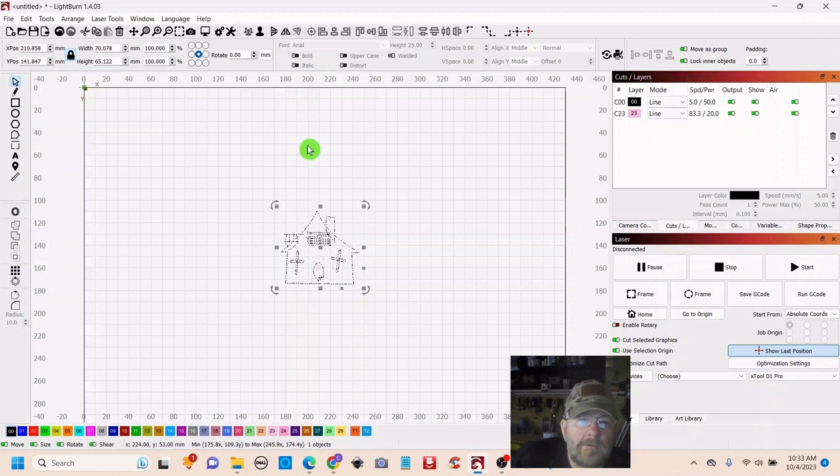We're going to make a Halloween village, and we're just going to do it on the fly. I didn't do a lot of planning for this because I've been pretty busy, but let's do this. So I got some free vectors off the internet, and I'll put links to those in the description. And we're just going to start with an old house. It says it's haunted. I guess we'll see.

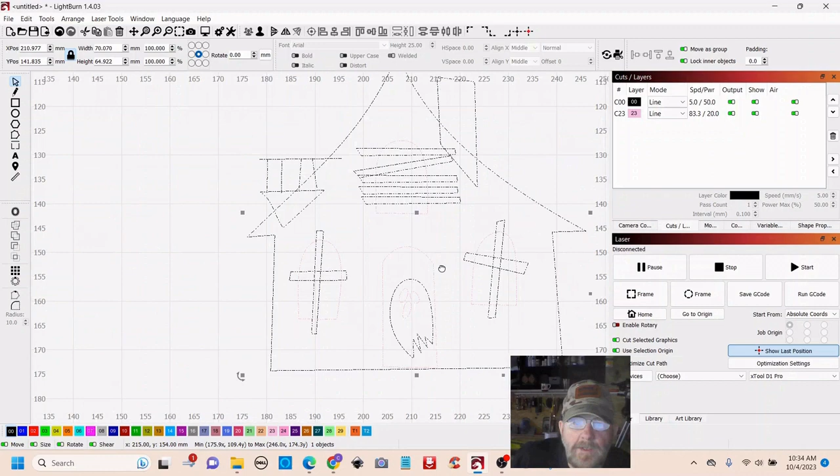Sometimes when you download vectors, they're not real straight. So we're going to put a tab on the bottom of this. So let's try to straighten it up a little bit. And just select the entire piece. And remember, you can scroll in and out with your mouse wheel. You can push down on the mouse wheel and move the entire canvas. And we'll just pull this down to one of the grid lines. Straighten it up as much as we can. That looks pretty good.

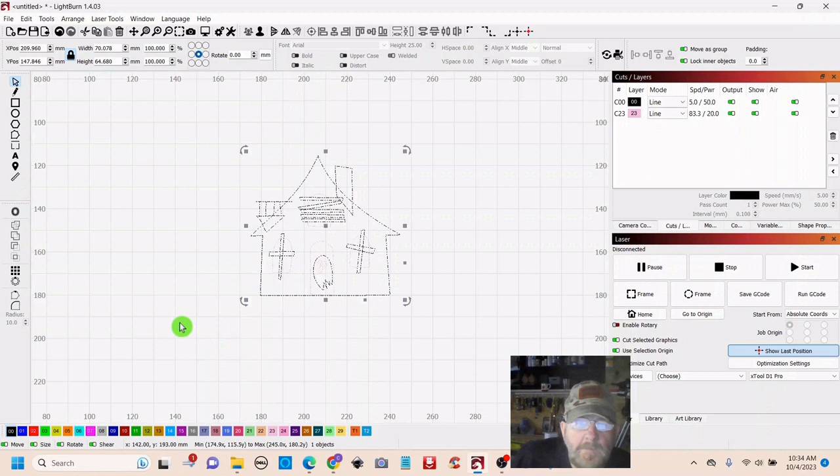Okay, now we're going to just make this a score. So set it for whatever your score is. I'm using a 40 watt xTool. So this is what I have set: speed of 40 and power 30. Depending on the wood, sometimes that can be too much, but it works pretty good on the 3mm plywood that we'll be using.

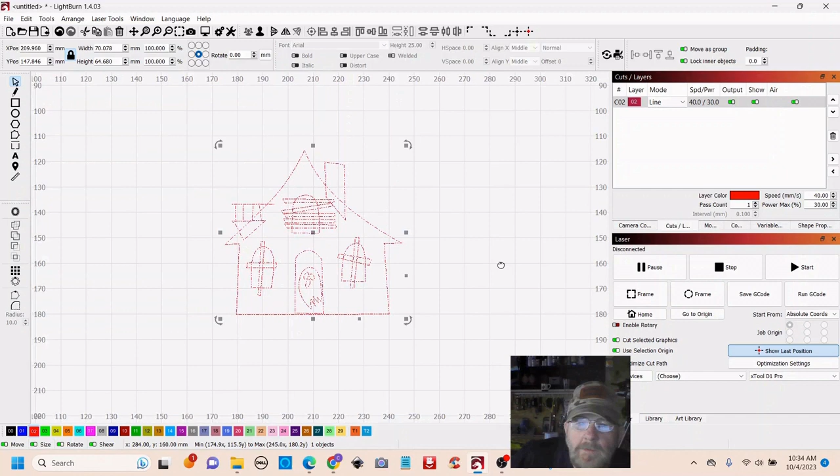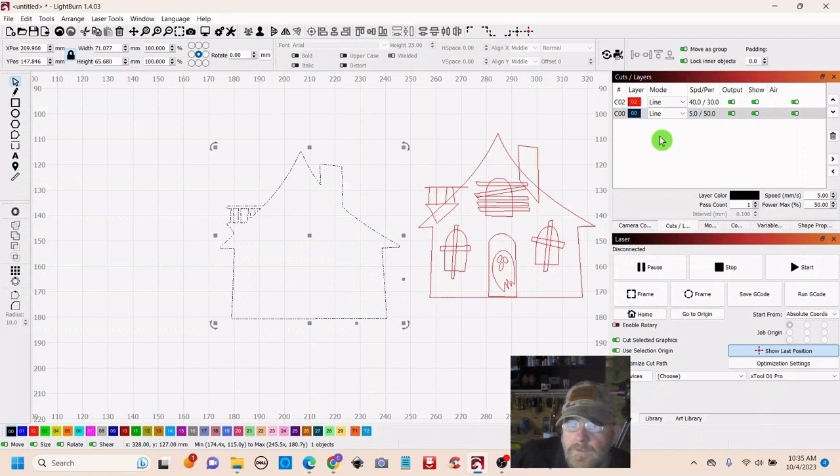Okay, so now you want to select again, go over to the left, do an outline. I've just got it set for a 1/2 millimeter. That should work fine. Then pull your original out of the way. Select your outline and set it for a cut line. And you can see off to the right, this is what I have set for cut. And be sure you always keep your cut line on the bottom so your cuts will be last.

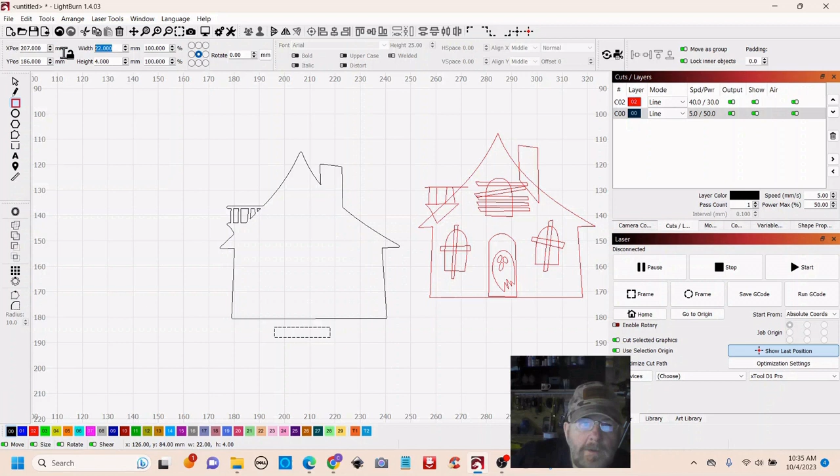Okay, let's put a tab. So grab a square off to the left, draw it out. Go up top, make sure your lock is off, and we will make it about 45 millimeters width and 3 on the height.

I got an allergy thing going on, so I'll be making some noise.

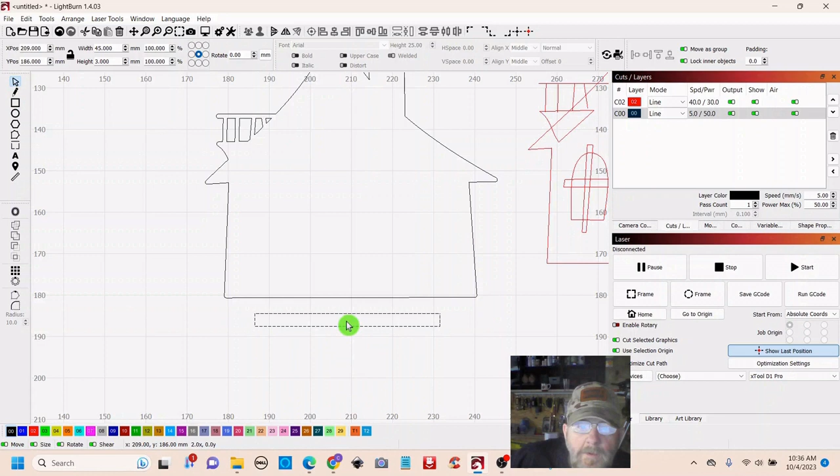Okay, so now select your arrow at the top, and then we want to snap this to the bottom of this, and we'll see if it'll connect. If not, we'll make an adjustment. Your mouse cursor will change to a line, and you can pull it up and snap it. And it looks like it connected here, but not here. So we're just going to make a correction. We'll go up top, and instead of a height of 3, we'll make it a height of 4.

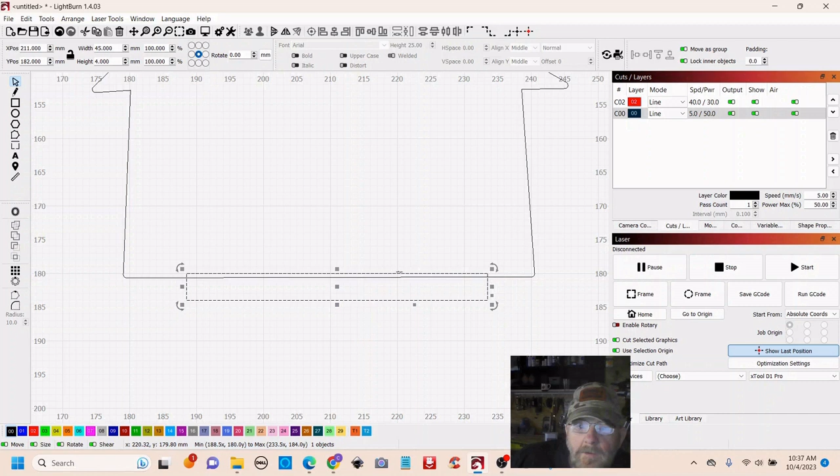And then we will just break the plane like so. Something like that. And that'll give us a little tab on the bottom. We just want to cross that line so it'll be kind of straight and not push through the bottom of our stand when we make it. So you would want somewhere around a millimeter across, not too much more though.

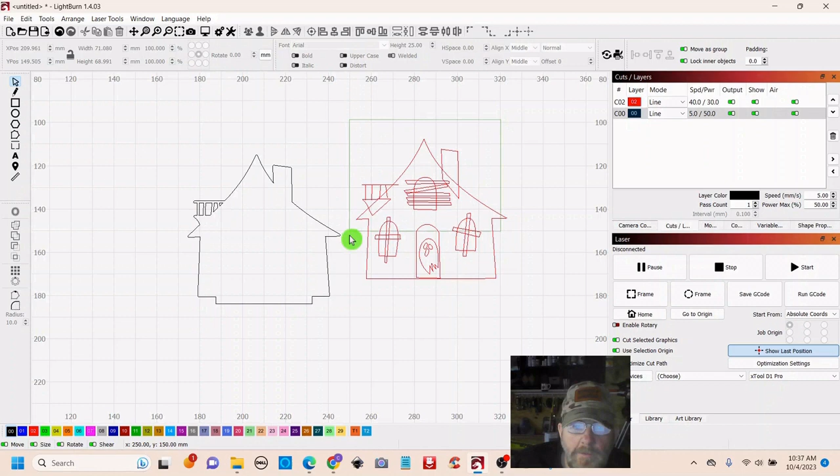Okay, so leave it selected, push shift, select the outline, and then go up top to horizontal align, and it will line it up for you. Then go over to the left to weld and click weld, and there we go. Now we can put our scored house back inside. Alright, that looks pretty good.

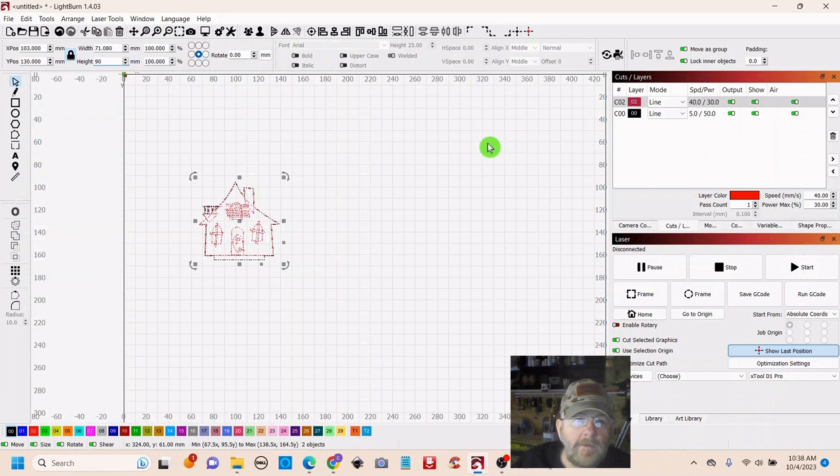Alright, so lock the lock back up top after you select the house. Lock it back, and then let's do a height of about 90 millimeters, and that'll give us about 3.5 inches of height, a little more. And when you lock the lock, it will adjust everything proportionately. Okay, so select, right click, and group, and our house is done. We'll just move it over out of the way.

And let's go back out and get us a dead tree. And again, all of these vectors will be linked down in the description so you can go get them.

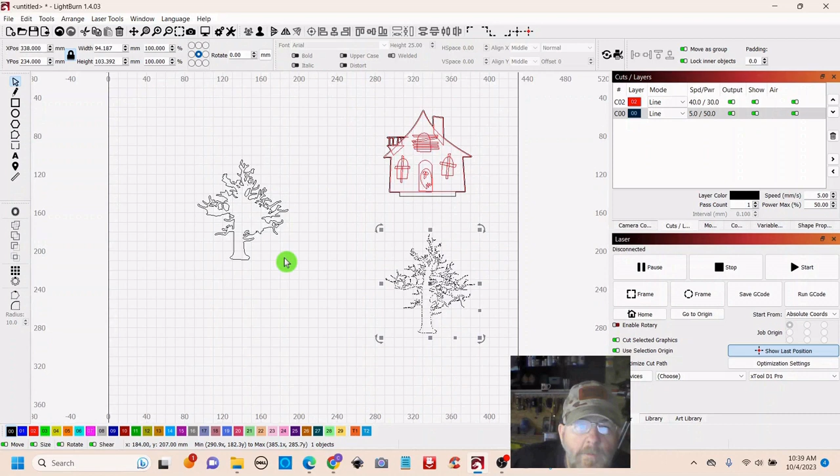Okay, so we can just go ahead and outline this. And the 0.5 is good again. Then grab your original, pull it out. You want to check out your outline, make sure there's nothing real weird with it. Looks okay. We've got to put a tab on that as well. So our tree,

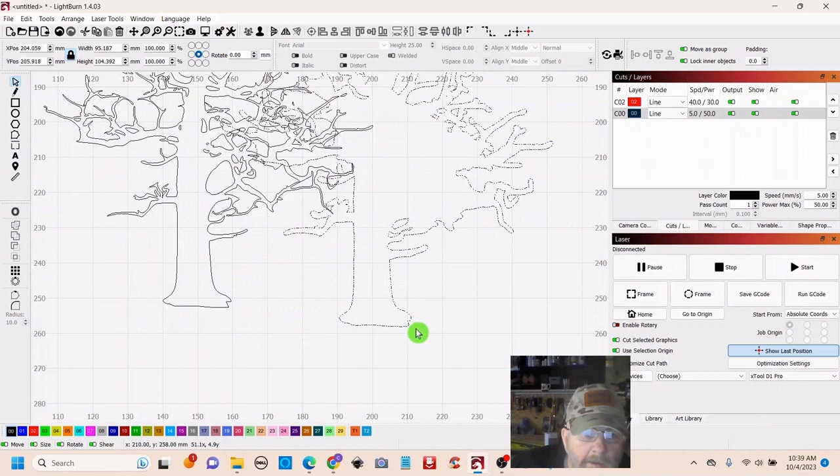I'm going to hit Control Z and put it back inside. Select the whole thing and put it up to the house just to get a reference. And that actually looks pretty good. Trees are normally a little taller than houses, so we'll go with that. Okay, so now I've got to grab the outline and pull it away.

And then we can select our original tree and make it a score. And then we can grab a square, come over here and make a tab that's big enough to work with the tree. That looks pretty good. We'll go ahead and make it 4 and pull it past the plane, and I should have unlocked that, and then we can stretch it out to the width of the tree.

Click our arrow to select. And it can go past, it's not going to hurt anything. Scroll in closer. And we will just break the plane with it, like so. Make it a cut. Leave it selected and then shift, select the tree. Go over to the left to weld. And now we have our tab.

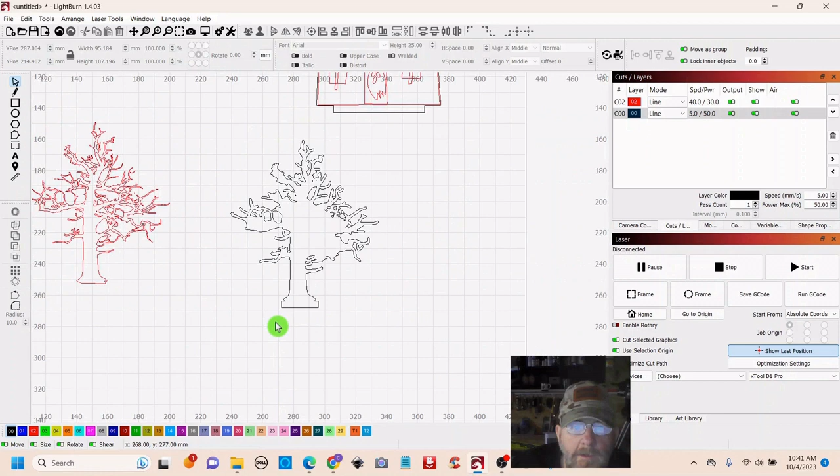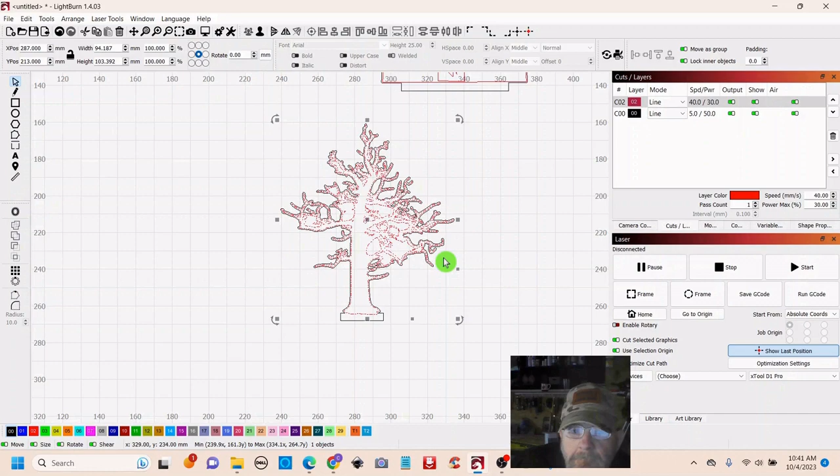Now we can put the tree back, get close enough to see and make sure we line it up properly. Sometimes the alignment tools don't work right if you have too much weird stuff going on like these limbs, but that looks pretty good. I think we will select the tree, right click, group, and call that done. Okay, let's go get something else.

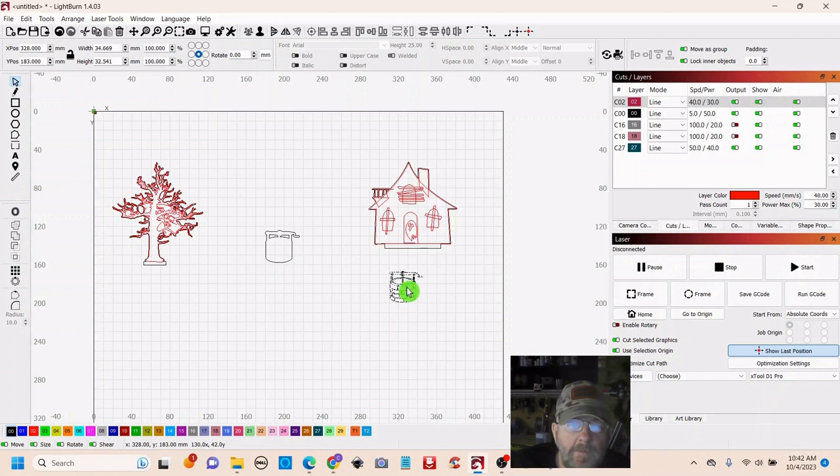That looks about right. Okay, so we will do an outline on that. Leave it at 0.5. Then we can pull out the original. Go get us another tab. And we'll just go ahead and make it 4 and 24. Looks pretty good. Just remember to click this arrow up top or you'll start making squares all over the page.

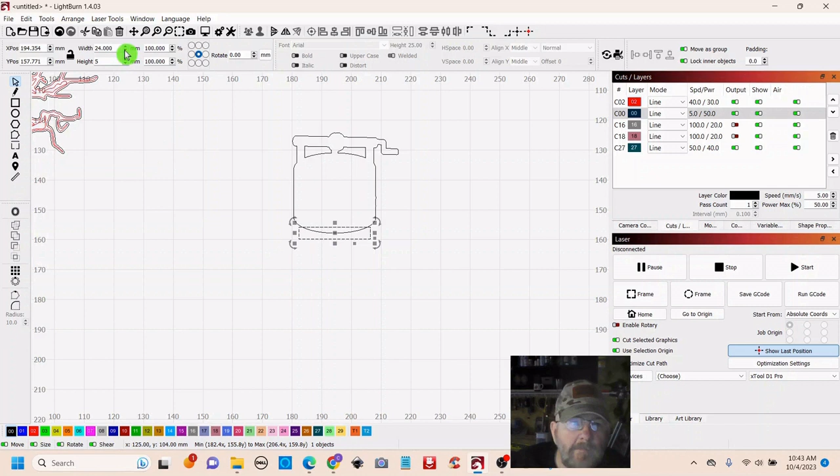Just break the plane. We can probably stretch it out because you want to make sure there's enough on the bottom to go into the wood you're working with. So we can probably make that 5. And again, if it was a square bottom, a straight line, it would just snap right to it. So that should work. So select your tab, shift, select the well, and then go over to the left and select weld. And there we go.

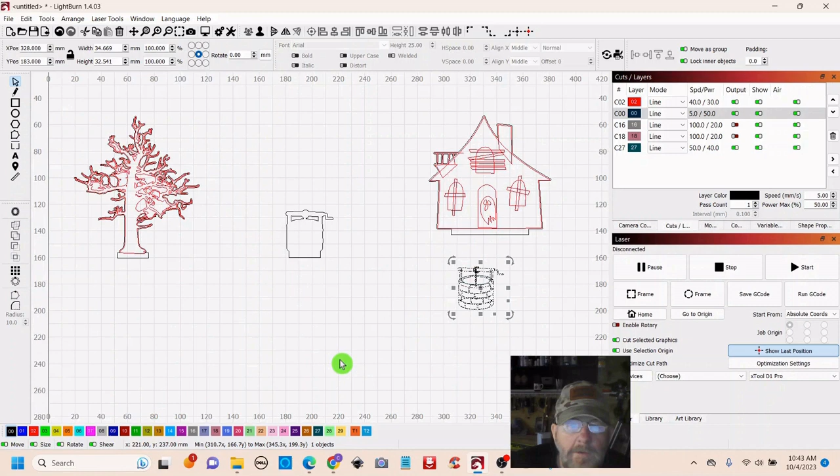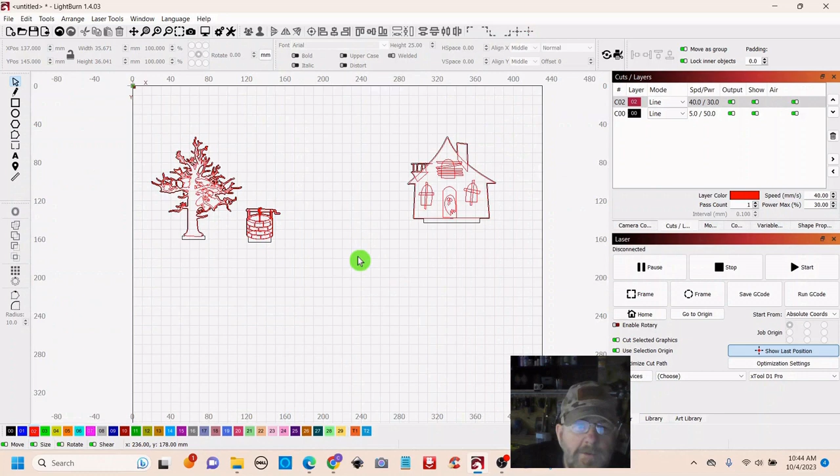Now we can set the internal portion to score. Bring it over and line it up. Looks pretty good. Select it and group it. And we're going to put an old witch in here at some point, so we'll make sure that's proportionate when we do that. So let's go back up and get us a gate and fence.

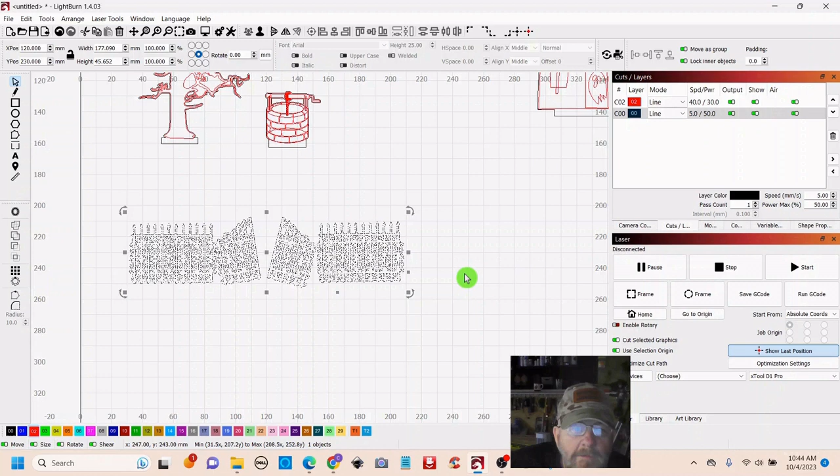I don't know. We'll see how this works out. That might not work out too good. Okay, so we're gonna do an outline on this. I guess what we'll do is make us a little graveyard, and this will be the gate in front of the graveyard. Okay, we can pull the inside out and go ahead and make it a score. And then we've got to find the best way to get a tab on here. So let's see what we can do.

Let's go up and grab a box. And just drag something out that will span the gate portion. And let's just move it up here and see how it looks. We can center that by leaving it selected and then shift and select the rest of the outline and push your vertical line. And I think we're going to have to make it a little bigger. I'm just going to drag it out a little bit.

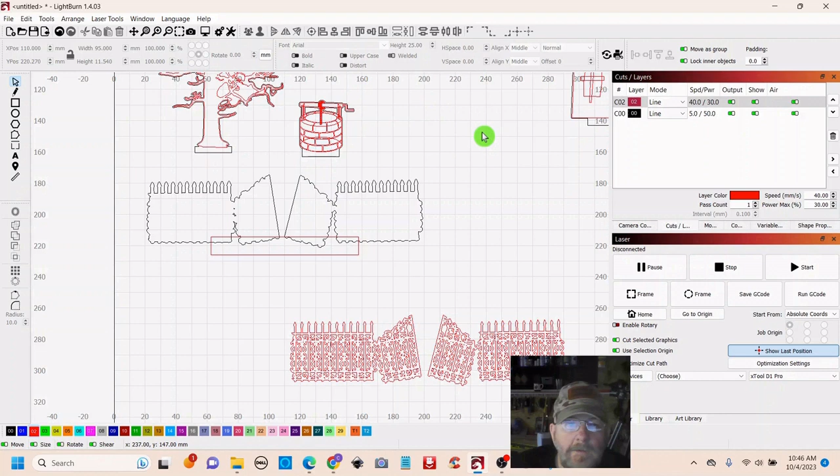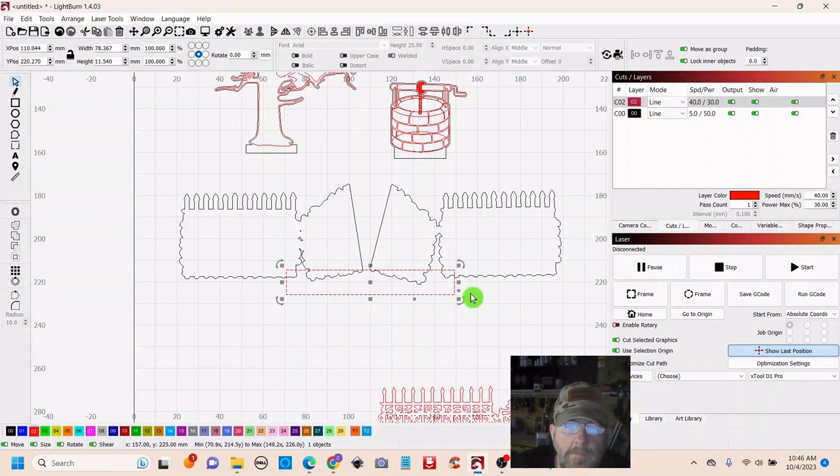We want to make sure there's enough to go through the slot that we make in the board. And some of these slots are weird sizes, so I may get confused. Maybe not. Yeah, that's a pretty long gate. I mean, pretty long tab. I'm going to shorten it up a little bit. And when I make the tabs or the slots, I'll probably have to remeasure these just to make sure.

So you could select that tab, make it a cut line. While that's selected, shift, select the rest of the outline, go over to the left and hit weld. Okay. Now we can grab the score portion and just get it set in there.

And then we will select it all, right click, and group. And it's pretty easy to make your own fence if you wanted to. Let me just take time to show you that, just in case you want to do it on another project. Just grab a square and make you a fence slat.

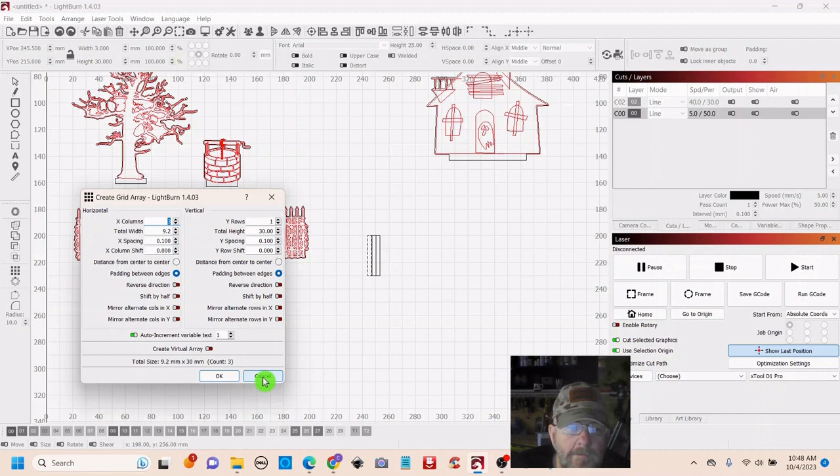Leave it selected. You can go over to array, and you set the width between the slats right here. So let's say 5 millimeter between slats, and then up here, let me move this out of the way. Up here on the columns, you just add... that is not enough width. So we are going to change the width. No, we're not. We're going to start over.

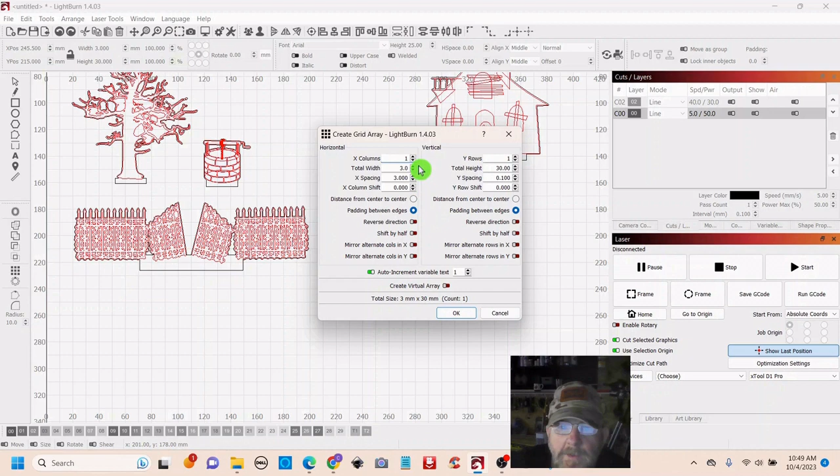Okay, so you have your slat. Click Array. Oh, I should have put it on spacing, not width. Okay. Spacing, let's just say 3 millimeters on spacing. I make mistakes, folks, so y'all just hang on. We'll fix them. So we have 3 millimeter spacing. We can go up to the columns, and it will add as many slats as you want.

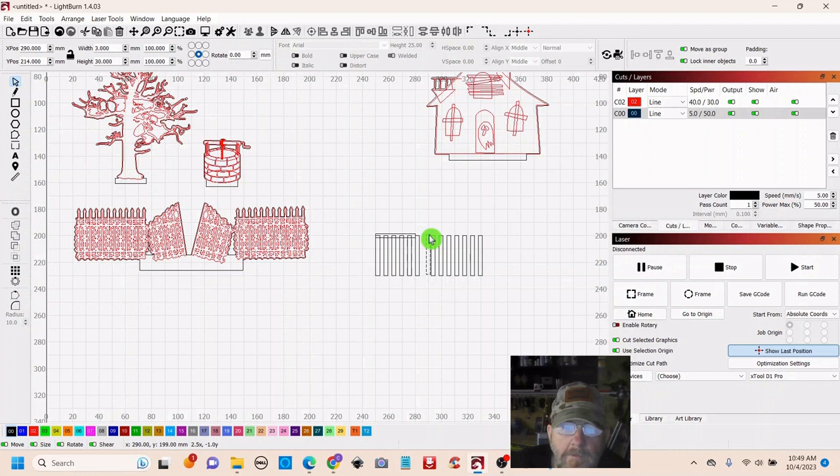And then you can pull one out, go up to arrange, adjust it, pull it back up here, line it up somewhere, wherever you want to. Control Z. You just want this top portion going across like so. And then you would want to duplicate it for the bottom and just get it out of the way.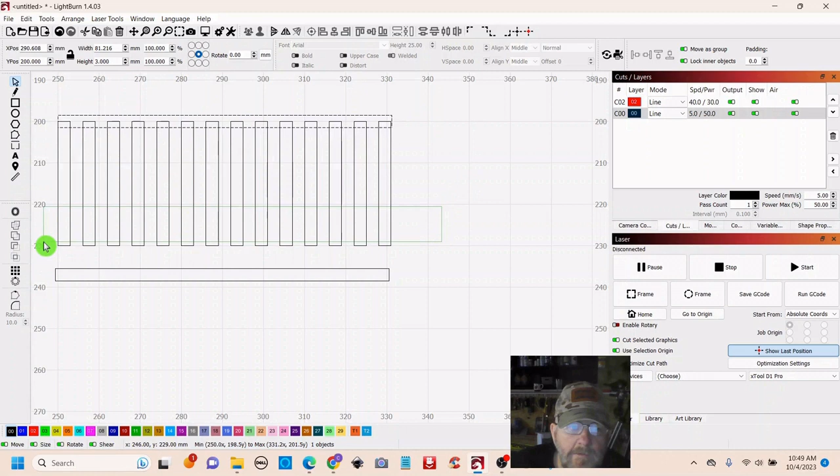And then you can select, shift, select all of your other slats, and then go over to weld and weld. And then you have a fence. And then you would do the same thing on the bottom. Shift, select, weld, and you have a fence. And of course you just make the gate smaller, turn it however you want to, and then do what we've done here on the bottom, and it would hold it into place.

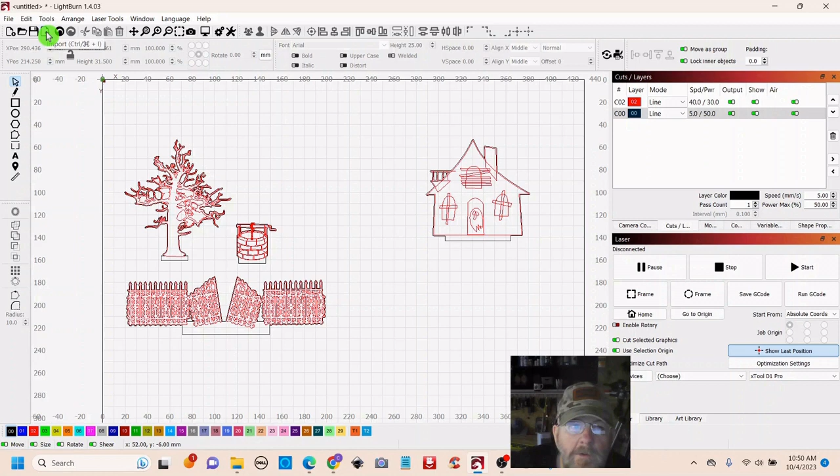Okay, so we will go with the original gate we had. Took us a little side trip there. Alright, let's see what else we can grab. We'll get everything made, and then we will make it as proportionate as possible. Alright, we got a tombstone here. It's pretty big. We will make it small and put it back here somewhere. Let's go get another one. Make them about the same size, and we'll probably have to resize these before we finish.

And then let's grab one of these, duplicate it, put it in the back, and make it a little smaller for a little forced perspective to make it look further away. Okay. Alright, let's go get something else. Here's our witch. So we have a witch. We want to size her up, make sure she's not bigger than the house. Probably about there, whatever that is. She's still a pretty big witch.

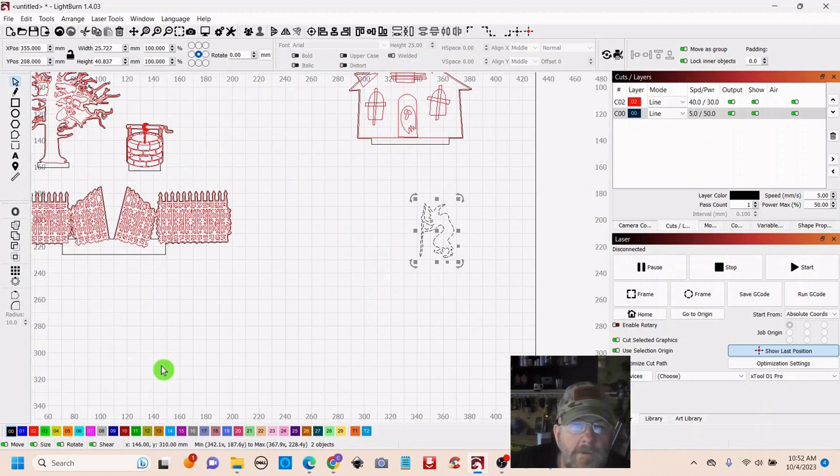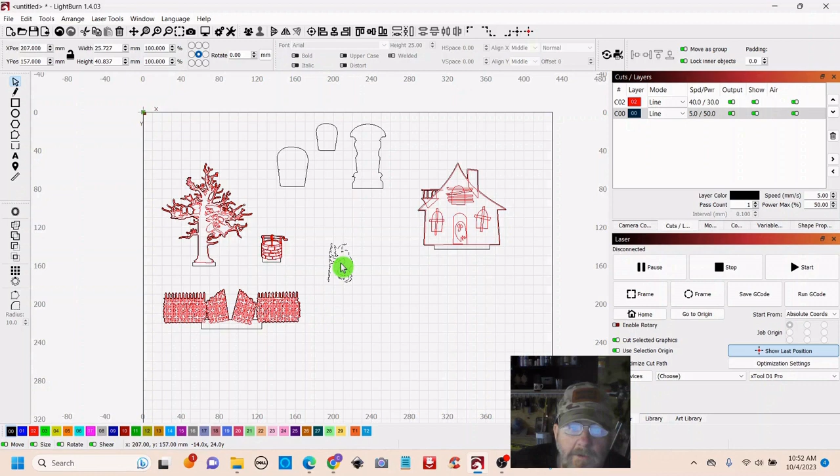Okay, so let's see how she looks up to the well. Okay, so the well probably needs to be a little smaller, like so. Let's see how she looks up to the gate. It's a big gate, so she probably can't see over that. And you can plan all of this out and know your height and everything for all of your pieces. But I did not have time to do that. So now we're going to resize this. Okay, that looks pretty good.

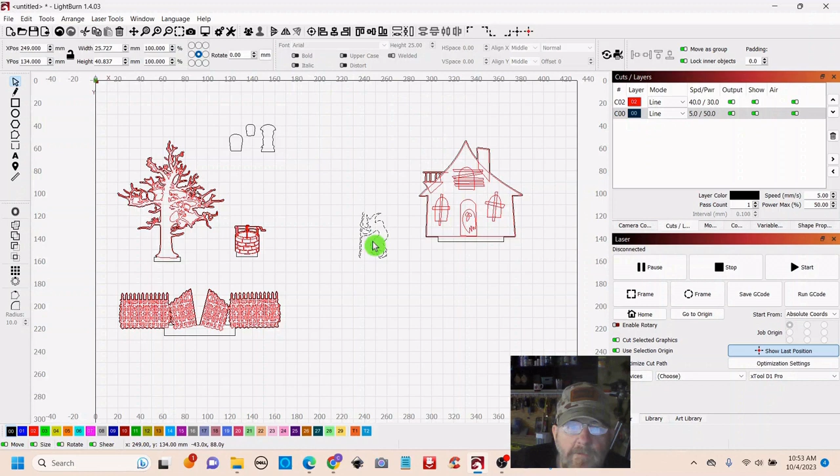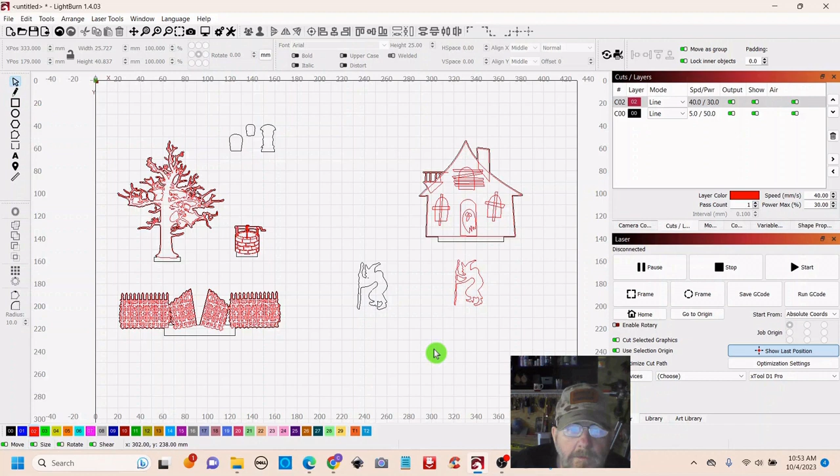Alright, so we have our witch. We can do an outline on her. I'm not sure it'll show that much. But we'll do an outline, and we will do a score. And then we will add a tab to the bottom here. Well, matter of fact, let's go get a brew pot first. There we go, brew pot. And then we can maybe have her approaching the brew pot.

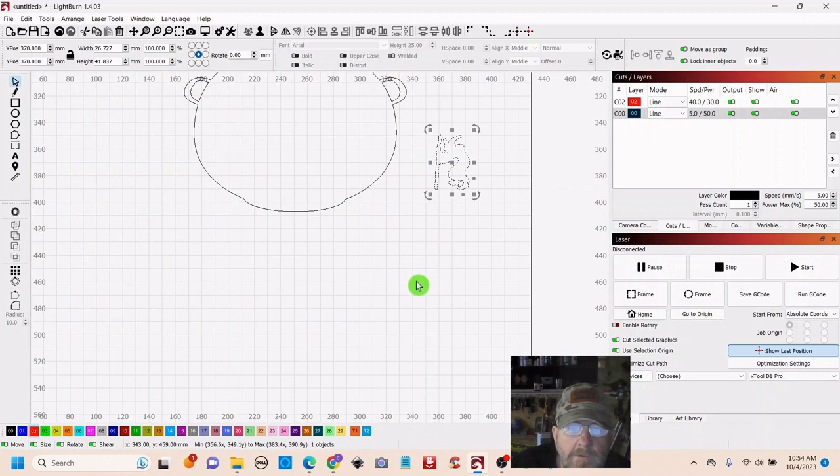So we need to ungroup this brew pot and then get rid of some of these errant bubbles. The ones that are attached are fine. And you could attach these as well, but we'll just get them out of the way. Okay, now let's make the pot proportionate to the witch. Control Z to go back, because I ungrouped it. I could have lost part of it. Now we'll group it, resize it.

And it looks like she's approaching the pot now. So now we can do a tab. And we will just pull the tab out the full length here, and just leave it at 5. Click the arrow. You got to attach to one object at a time.

Weld. So we will leave that selected. In fact, make it a cut. Leave that selected. Shift, select the witch. Go over to the left. Do weld. Now we have two objects again. We can select the first object, shift, select the second object, and then hit weld again.

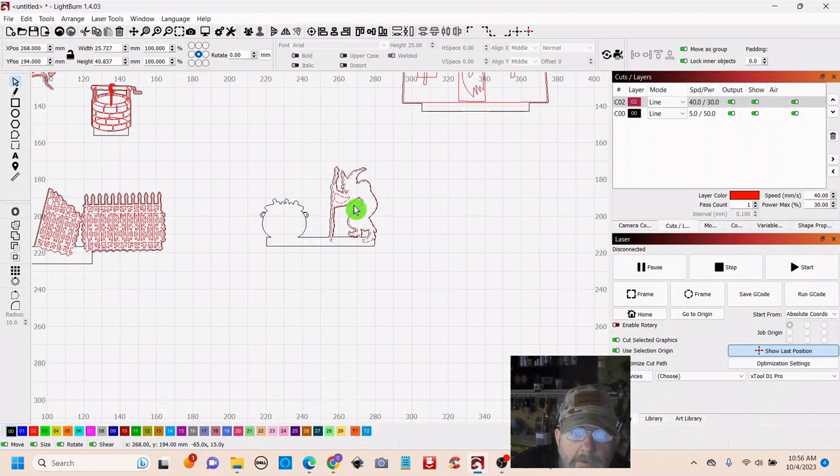So now we have the witch approaching her pot. And now we can put the witch back inside.

Okay, folks, I got to take a break just a minute. I have somebody ringing my phone off the hook, so I will be right back. Okay, I'm back.

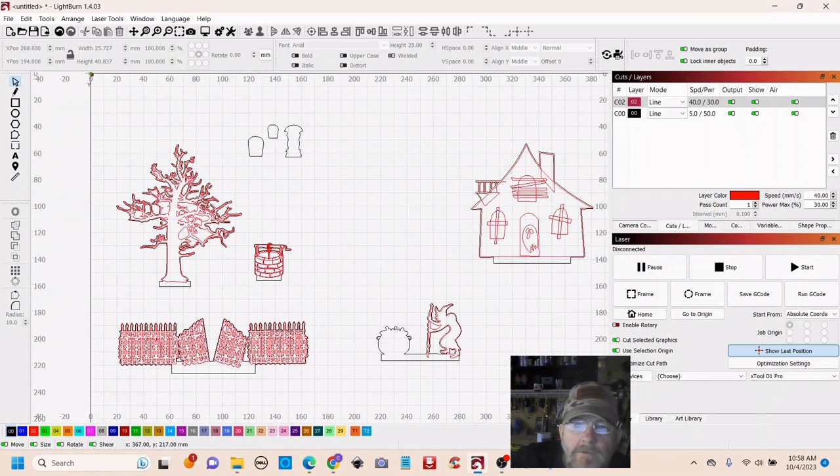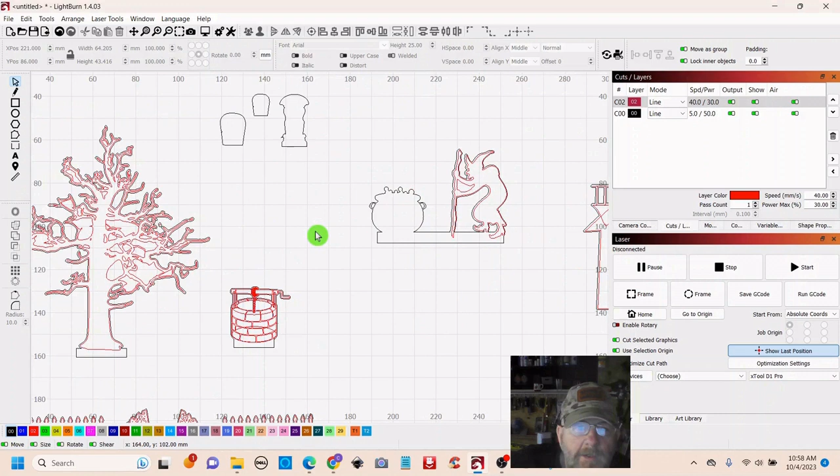So, I think we need to make some slots now. I don't think I had any more. Oh, we're going to use a font on these tombstones called Phantom Fingers.

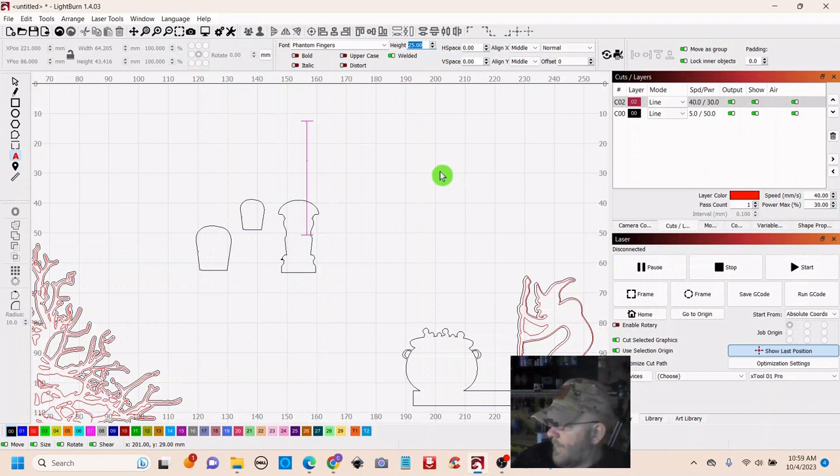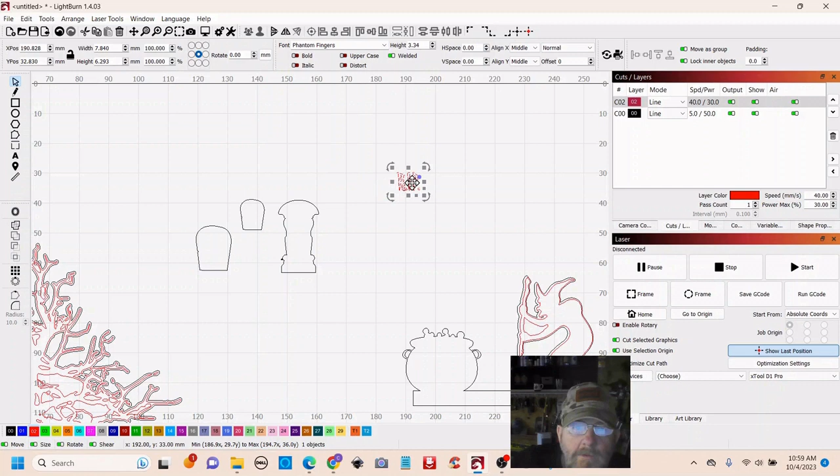Right here. Okay, we're just going to put rest in peace, much smaller than that. And then select your arrow, and you can just resize this to fit. Let's make it a score. And that looks pretty good. Duplicate it, put it on the others.

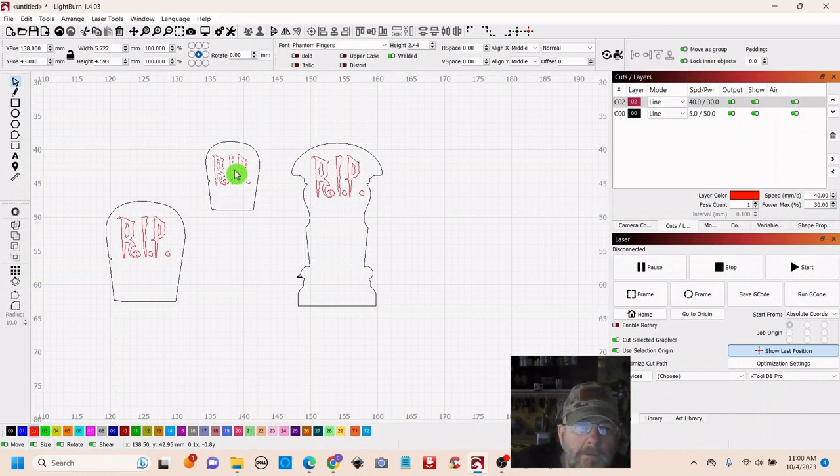Resize from the corner. And there we go. You can center it by leaving it selected. Shift, select your tombstone. You can hit center, or, I'm going to hit Control Z. You could have just hit vertical right here, and it would take it to the center and leave it horizontally where you intended it to be.

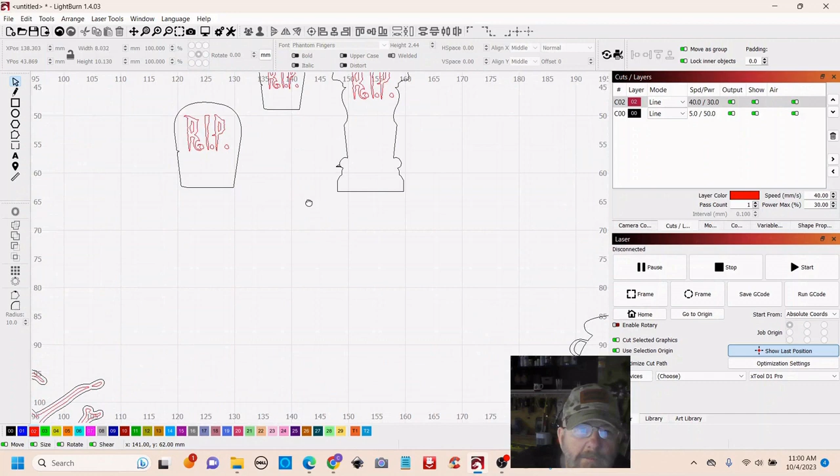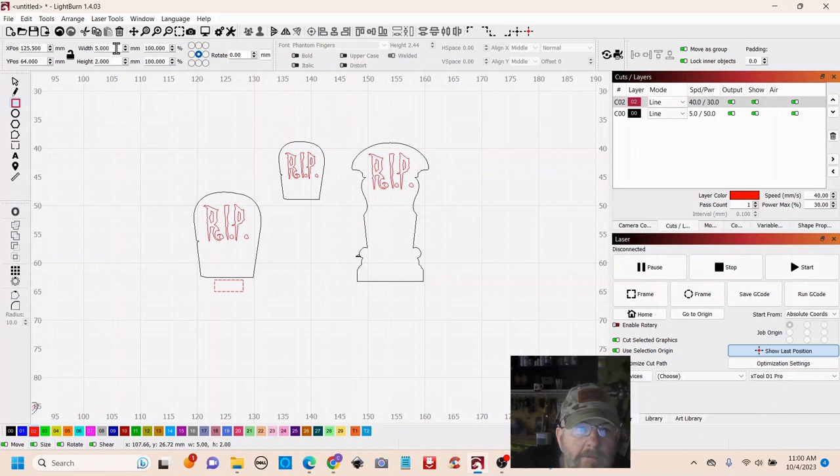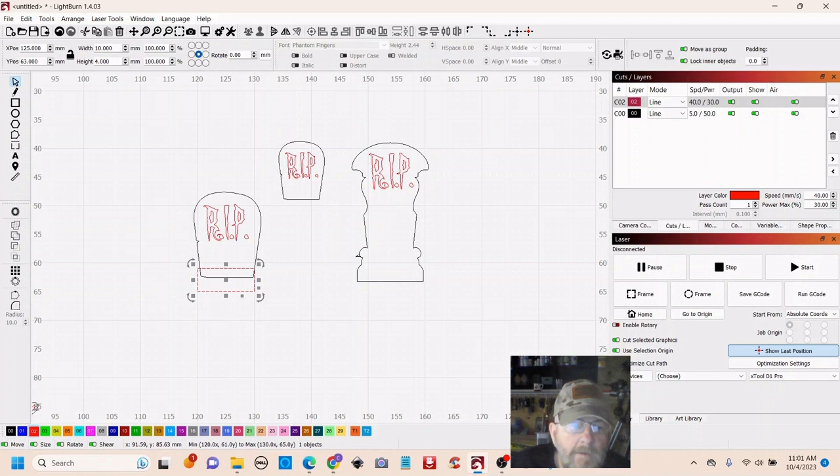I guess we could put some tabs on these tombstones. Make them all the same size. That might make it easier for making slots. So we will make it 10 millimeters by 4, because we're going to have to break the plane since this one's straight right here, but the other ones are a little weird. So we'll break the plane, make it a cut. Let's go ahead and duplicate it so we have some for these others.

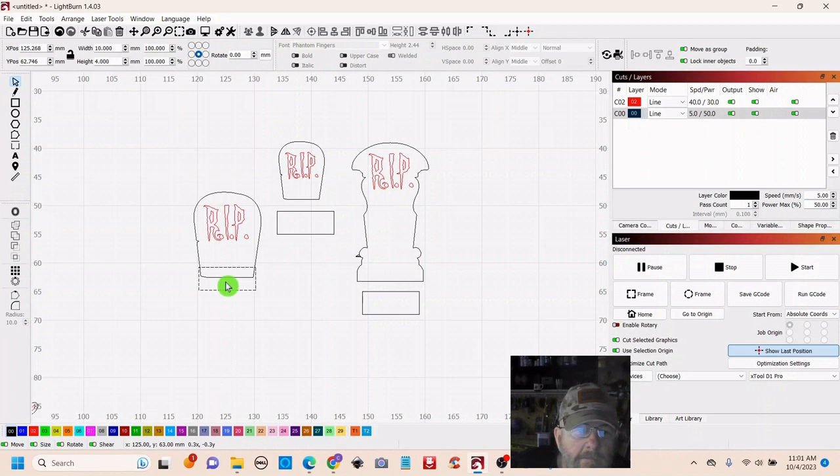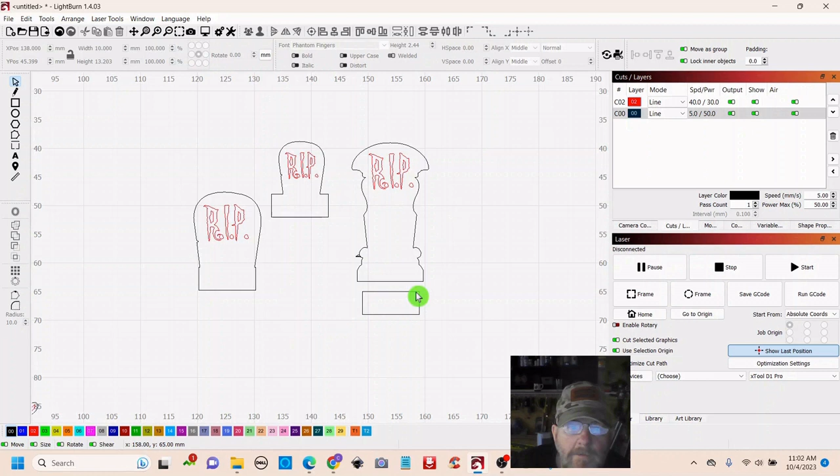And then we can just center it wherever you would like. And then shift, select the tombstone, and then hit weld. And there we go. And we will do the same thing up here. Shift, select the tombstone, then weld, and the same thing here. Shift, tombstone, and weld. Okay, so then you just want to group these together so your rest in peace stays where you want it.

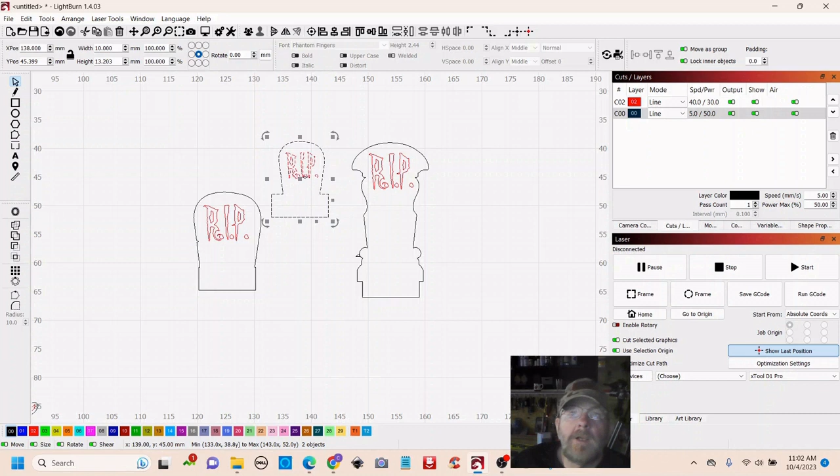I'm sorry if I keep getting out of view of the camera. I keep leaning closer so I can see better. And I'm not as used to this camera as I should be.

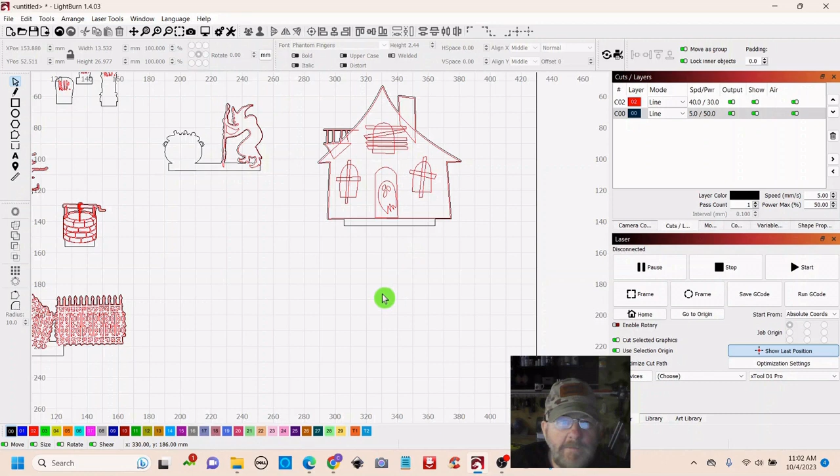Okay, so let's make some slots, and we'll do a kerf adjustment on the slots. So let's do this one first, the house. So we're using 3 millimeter plywood, and if you don't know, the kerf is the amount of material that your laser removes above and beyond what you specify. So we will make the slot slightly smaller than the tab.

And to make sure we get the tab long enough, you can just move your box and then take a look. We know we need a width of at least about 60 for the slot to work. Okay, so we're going to round off these edges. If you leave it selected, go over to radius, click radius, and then you can just click these corners and round them off. Looks a little neater. And then hit your arrow,

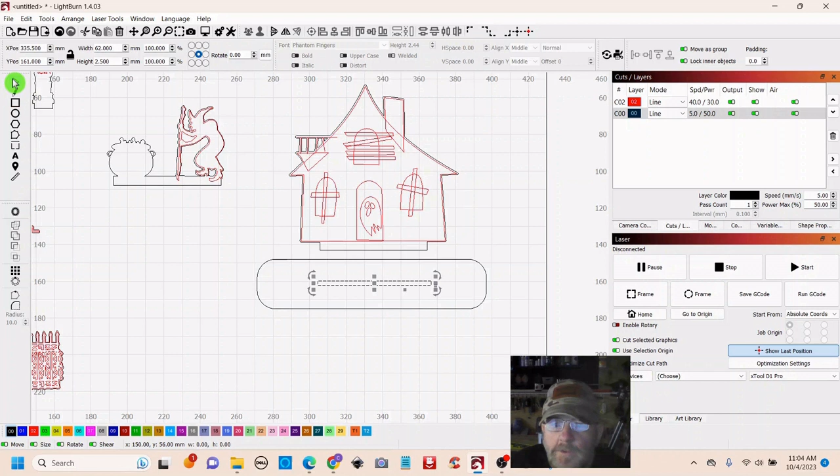and then we will make a slot. And we're going to make it 60. We'll make it 62 for good measure. And then to adjust for the kerf, we're using 3 millimeter plywood. We're going to make the slot 2.5. And that will allow it, when the house goes into the slot, it will fit more securely than if you made it 3. Okay, so now select your slot, shift, select the stand, and then go to the bullseye, and it'll put it right in the center.

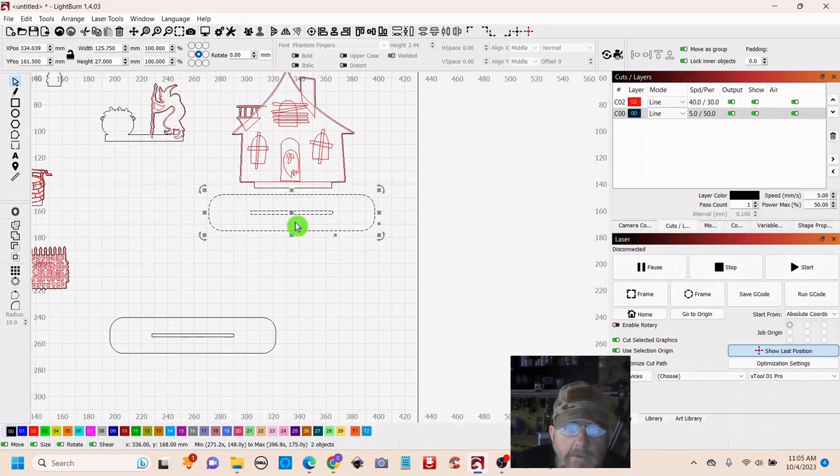So now you can use this as a gauge. So you don't group it together yet, just duplicate it. Get you one out that you can adjust for the others, and then you can go back and group that. Now let's see what we need for the witch. Let's bring the witch down. I'm trying to keep this where it shows up good.

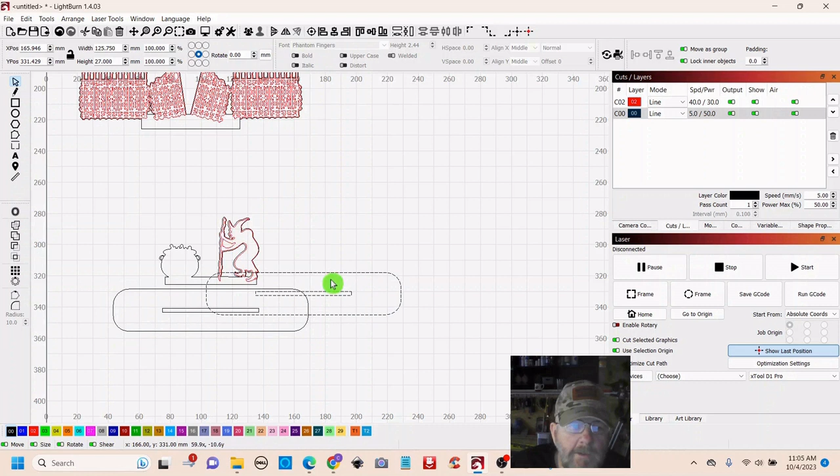And I think the slot will work for that one as well. So we're good on the witch. Let's duplicate and go check our gate. It needs to be a little longer for the gate, so just select the tab, drag it out, leave it selected, shift, select the rest of your stand, and then hit bullseye, and then you can check it again and make sure it's long enough.

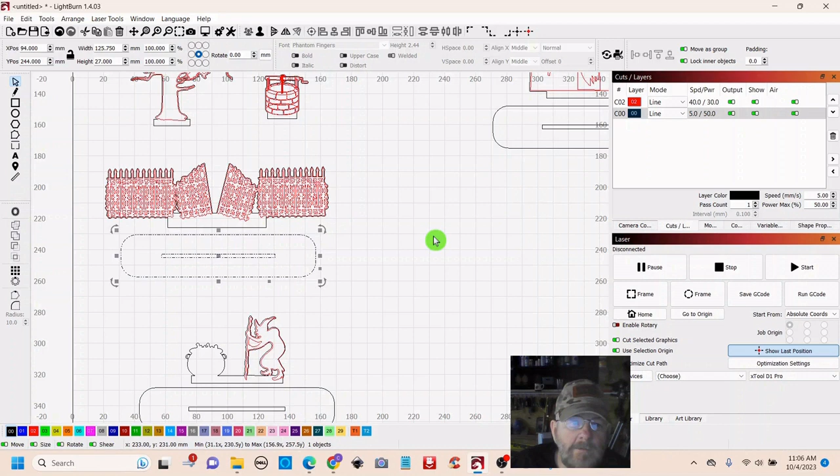Okay, that's good, and that can actually be grouped. You can group this. And let's make something for these. These will be much smaller.

My phone keeps going off, I'm sorry. People want me to do other things.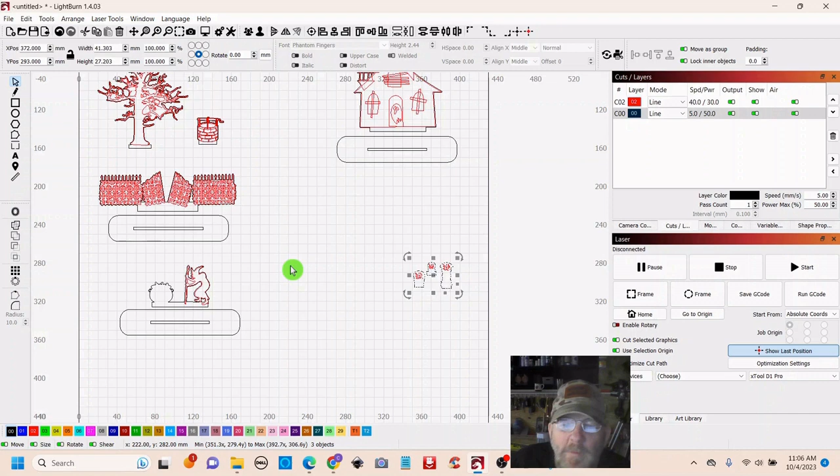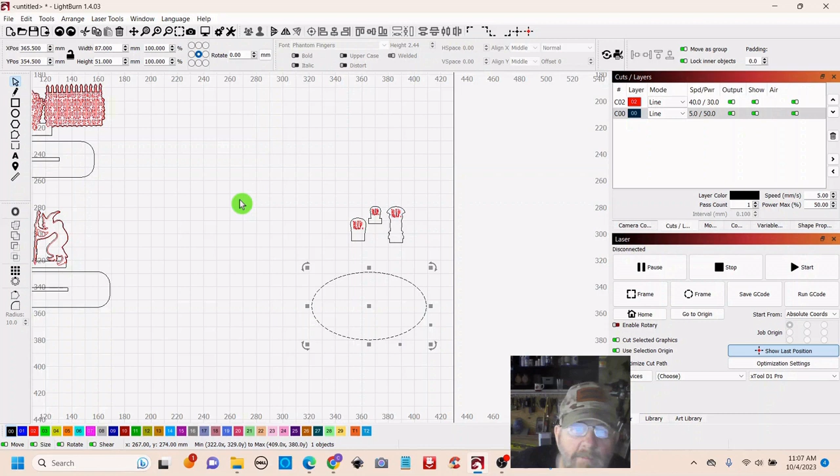So let's make something kind of oblong for this. Oval maybe. That should work. Just drag out an oval, and then we will Control Z to go back. Remember to click your arrow up top, or you'll be making things you don't want to make all over it. So you can set those in there, and then you can just touch the outside and readjust that size to whatever you might want. Okay, so now let's put some tabs in there.

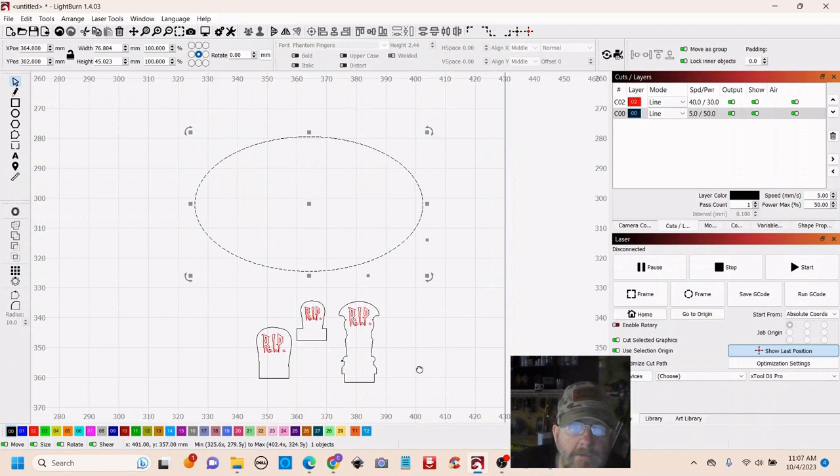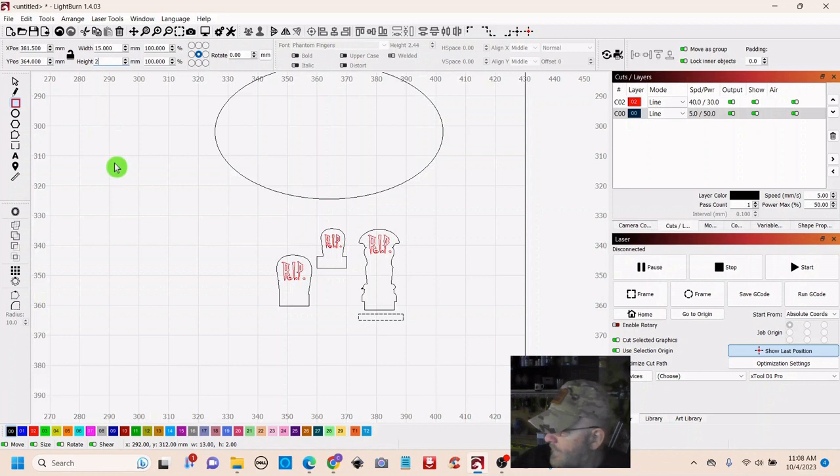Let's bring this a little closer. Go up, grab a box. And let's see what we made these. So, a length of 13. I guess we'll make them 15, just to be sure. We'll make them 2.5 to adjust for the kerf. Hit your arrow to select.

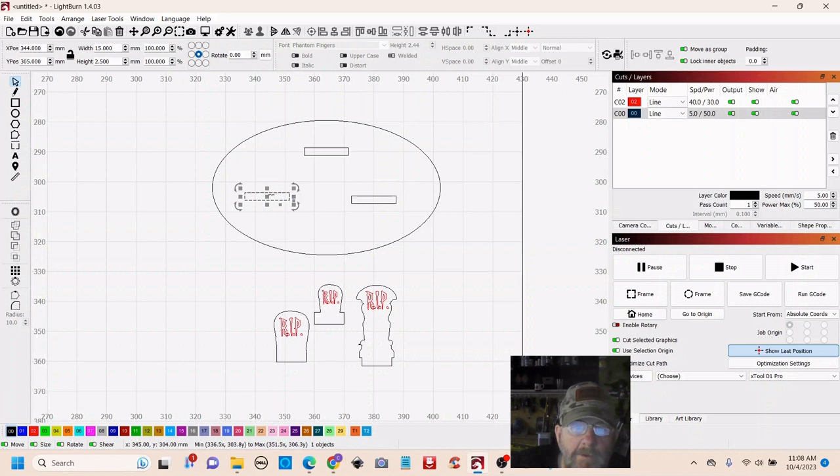That would be our one in the rear. Right click, duplicate, drag one out over here, wherever you want to put it. Right click, duplicate, and put you another one over here. And then you can just group that together. And that is done. Now we just have the well and the tree,

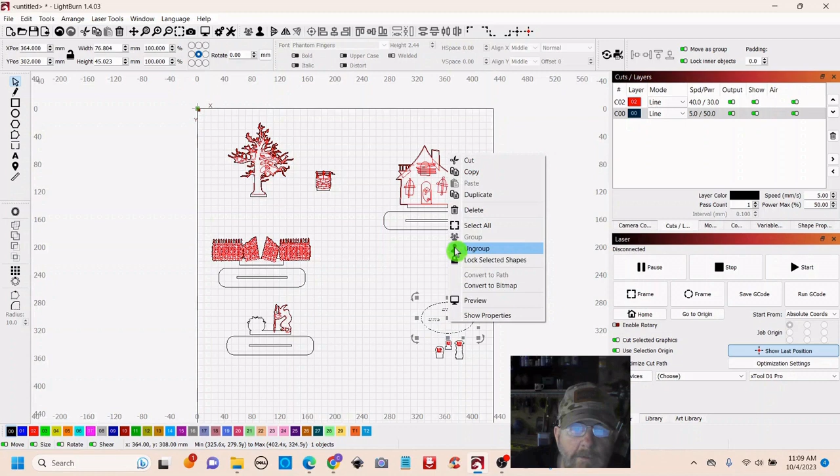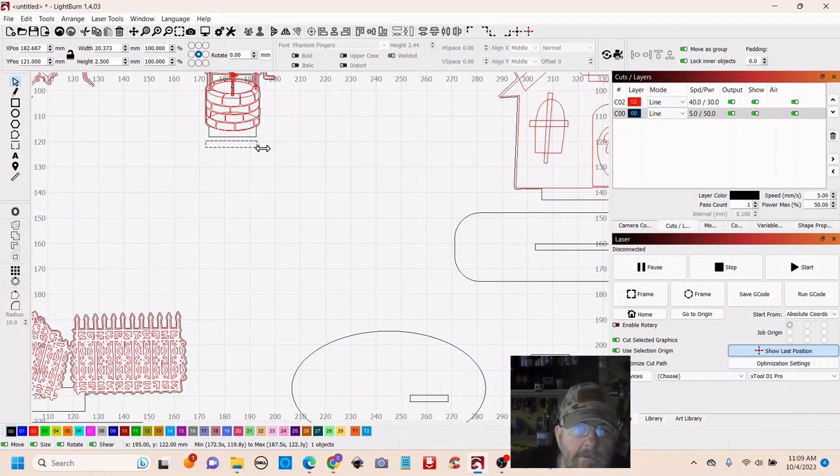which we could just make a small version of this. Let me duplicate that, and remember to ungroup it so you can resize it. I told you this was on the fly, but we're going to get there. You just need to make sure that tab or that slot will work. So it needs to be longer for sure. And then we can see if it'll work for the tree.

It needs to be even longer for the tree, so we will just pull it out and make one that will work for both. We get rid of these and delete. Okay, so we are going to pull this down, leave it selected, shift, select your oval, and click center, and there you go. Now you can group this together, then duplicate it, and then we have one for the tree and one for the well. And then you can choose where to set all these things in your scene.

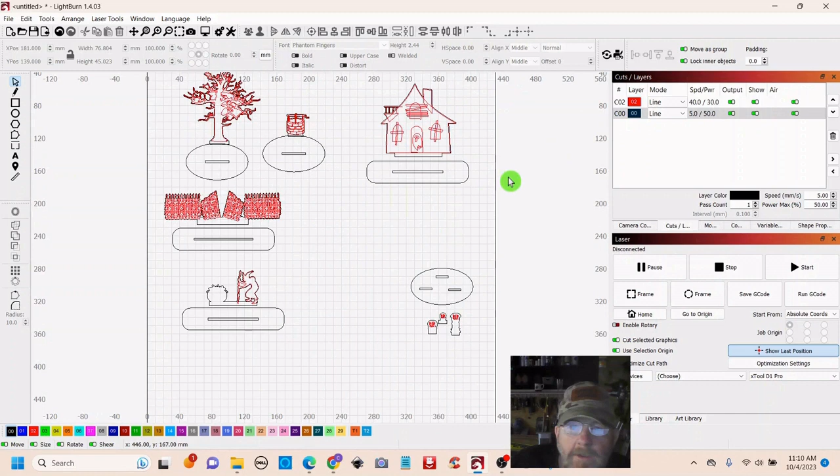So, we have our scores set. We have our cut line on the bottom. I'm hoping this will come out of one board, but it may not. I may have to cut two. But whatever it takes, that's what we'll do. So, let me get set up in the laser bed. We'll see what it's going to take to cut this out, and then I will come back and hit frame and start, and we'll get this cut out and see how it looks. Alright folks, I will be back shortly.

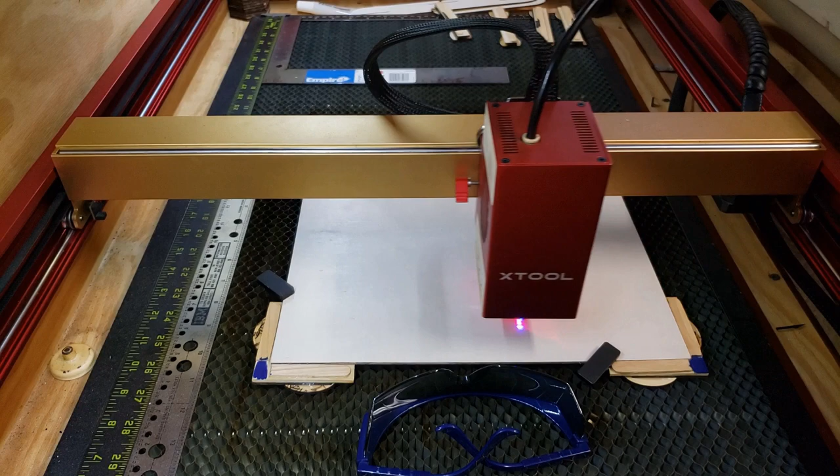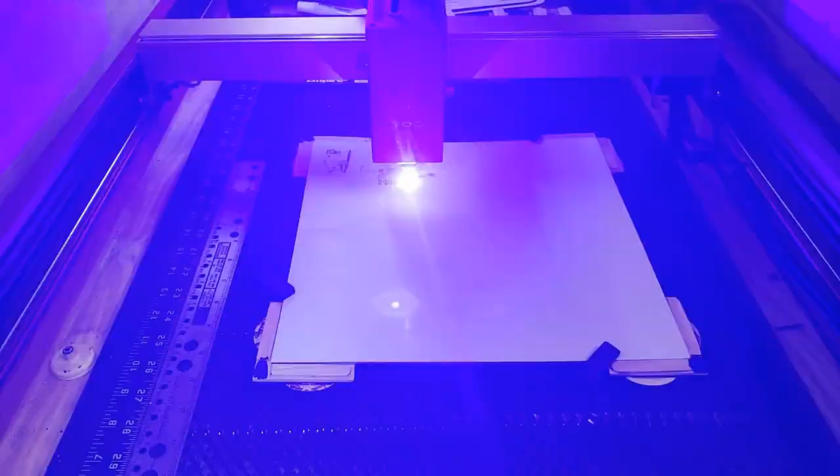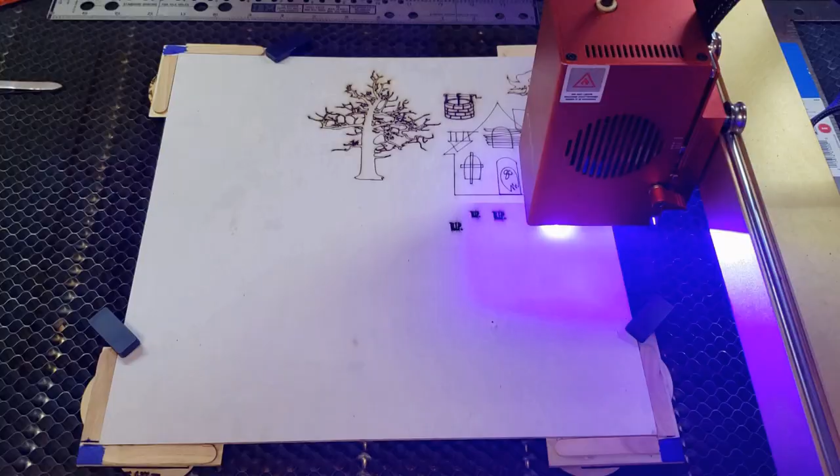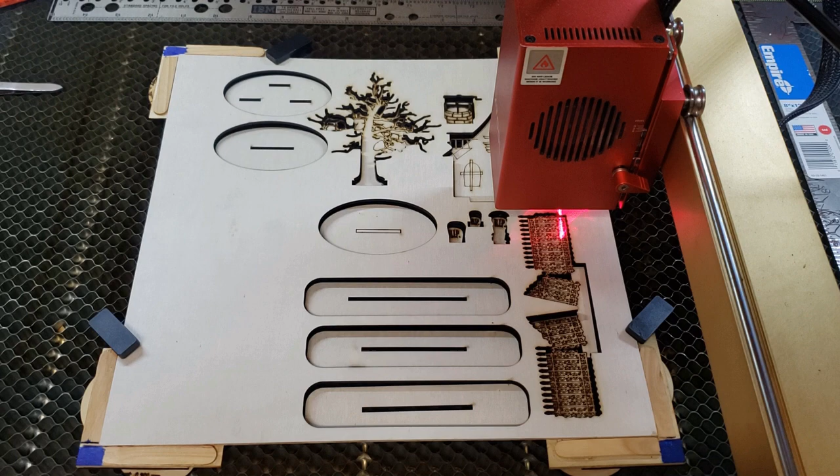Okay folks, we're all set up in the laser bed. We'll do a quick frame. Alright, let's cut this out, see what it looks like. Okay folks, it looks pretty good, so let me get it put together and we'll take a closer look.